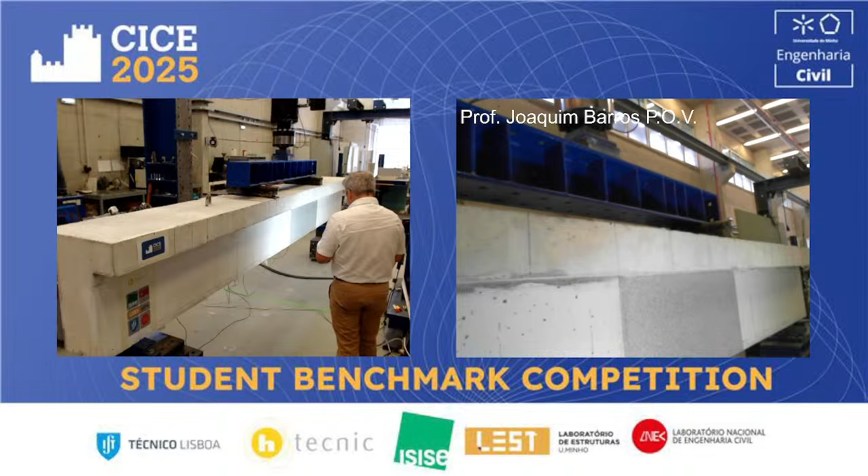At ultimate limit state, we will evaluate the maximum loads, the corresponding deflection, and the strain in the CFRP.

So we are ready to start loading. Luis, 10 seconds. Okay, excellent. So we are almost initiating.

These are the logos of the institutions supporting this experimental program.

It's also a great pleasure to announce that we received 6 participants using analytical models, and 5 participants using a numerical approach for making their predictions.

Today we will execute the first test, and later we will execute the second one. Then we will make the average of the results of the 2 beams. I don't know if I mentioned my name — I'm Joaquim Barros, and I'm coordinating this competition.

Okay, the load has already started. We will announce the loads. Manzuri is marking the cracks and the corresponding loads when they appear.

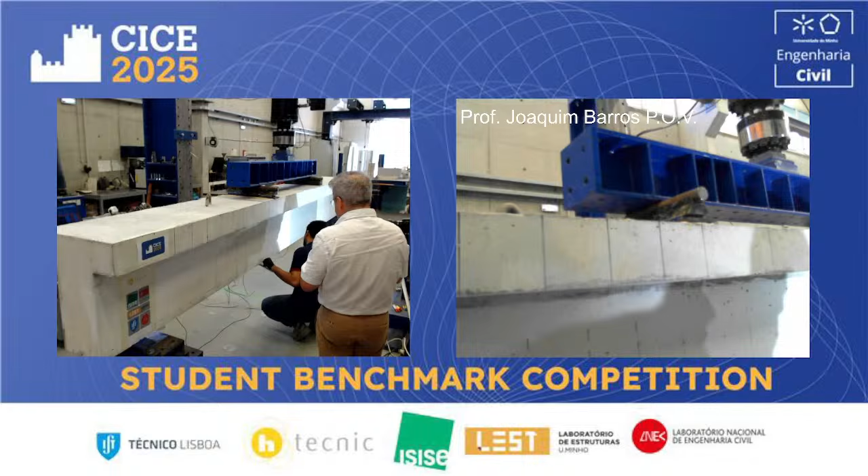So the load has already started. We have the DIC system here for a good prediction, to measure with accuracy the crack spacing and crack width. I remind you that crack width will be evaluated at the level of the flexural reinforcement.

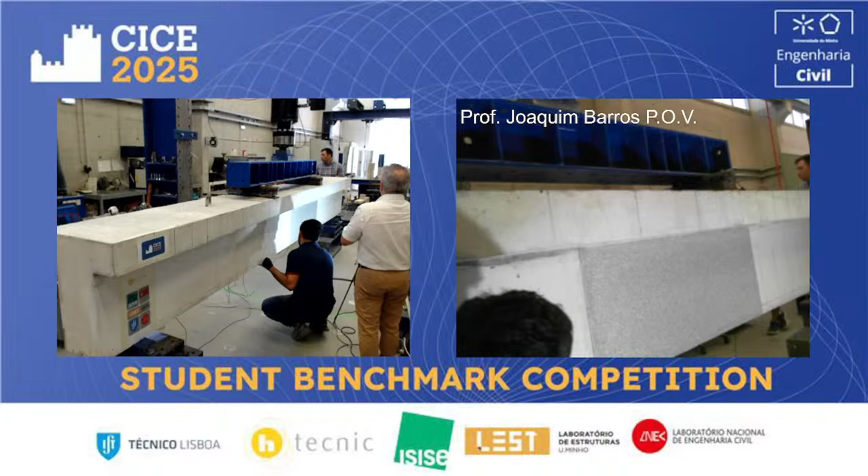So up to now, 30 kilonewtons. We have 30 kilonewtons at this moment. The test is being run in displacement control, controlled by an LVDT internal to the actuator, with a velocity of 20 micrometers per second.

40 kilonewtons. I'm going to the other side of the beam, where we have the LVDTs to measure displacement. We have one in the center of the beam, 2 in the loading sections, and 1 in the middle of the shear span.

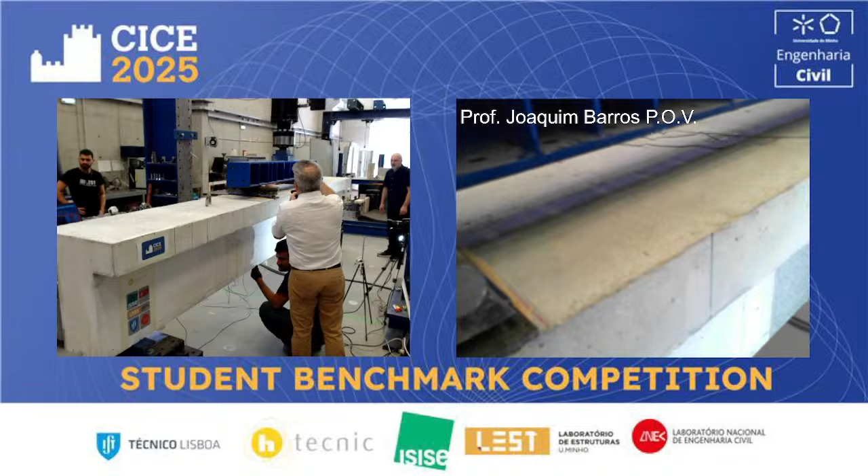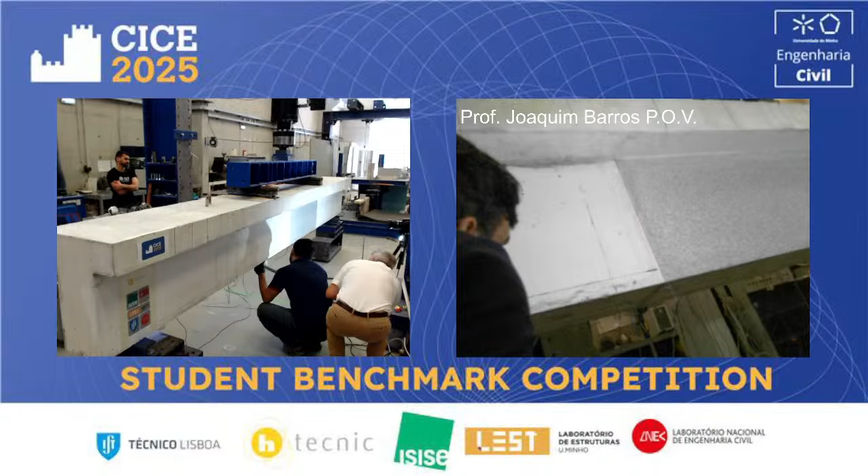We are also measuring the strain in the concrete. We have a strain gauge on the top to measure the strains in the concrete, and internally — do you see at the bottom — we have the strain gauges bonded to the CFRP as well as to the steel.

Load. The first crack happened at 70 kilonewtons.

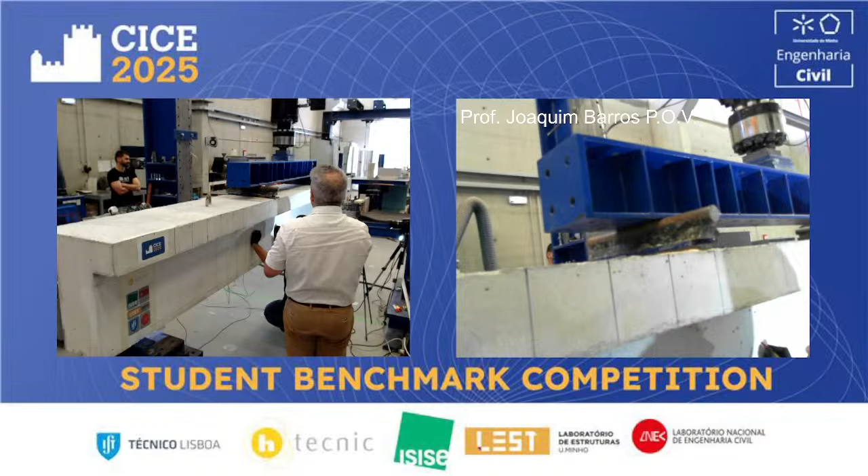Load. Manzuri is indicating the load — 74 kilonewtons at this moment. Load. 77, 77. As you can see, this is a flexural crack.

So in between the loaded sections — Load — we have 80, another flexural crack at 80 kilonewtons. It's progressing to the top.

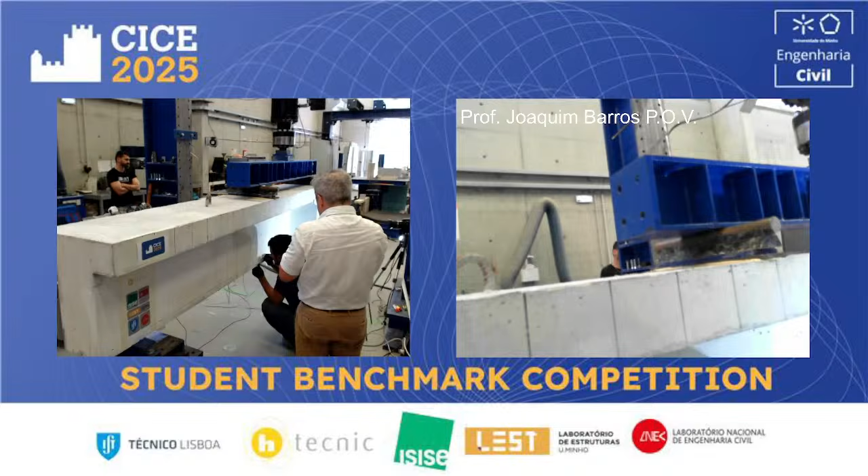Returning to my explanation: using the strains at the top of the concrete, and also the strains in the steel, we are able to evaluate the curvature of the cross section. This is an important indicator together with the moments, so using the moment-curvature relationship, we can estimate the evolution of the flexural stiffness.

Now the load is 87 kilonewtons. Do you see the crack spacing is quite nice, almost equal? 90 kilonewtons at this moment.

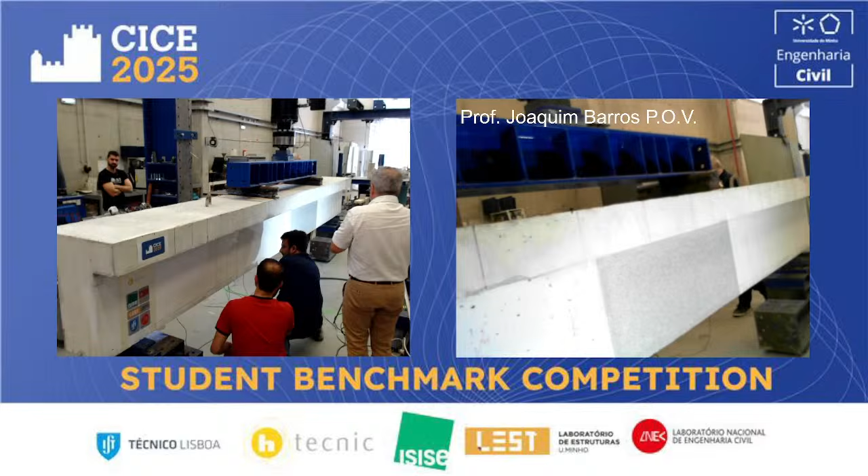So apparently we still have secondary cracks — do you see, now at 90 we have a secondary crack. In the DIC zone, obviously we cannot see the cracks directly, but we have cracks there as well.

95 kilonewtons. Load. 95, okay, 95 kilonewtons. Load. Another secondary crack, as you can see, at 97 kilonewtons.

Load 100. So the first crack in the shear zone, but obviously it is flexural, it is almost vertical. I remember again that we have several steel stirrups to force the flexural failure mode. We will see if the laminates will attain the tensile capacity in the failure of the beam, and if it happens, this means that we will mobilize the total capacity of the CFRP laminates, which will be very nice.

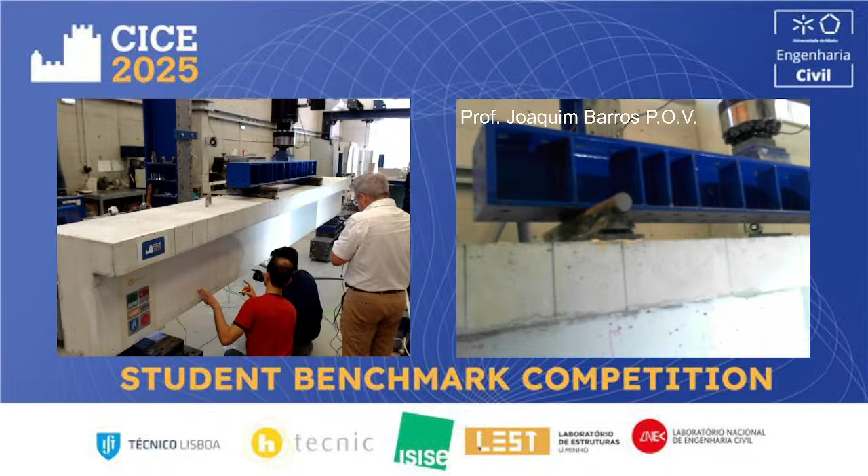133. It will be nice to verify if the existing analytical models and design guidelines are able to predict the crack width and crack spacing. Mainly crack width is quite difficult. It's even very difficult to estimate the crack width using finite element models, mainly those using a smeared crack model, because the crack width in the smeared crack model is the product of the strain normal to the crack multiplied by a certain characteristic length.

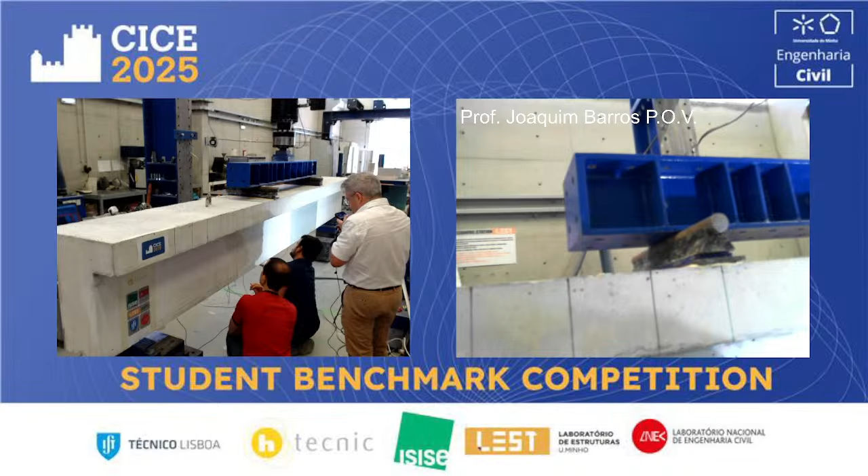We have some difficulties still to estimate this characteristic length, to avoid the results being dependent on the mesh refinement. This characteristic length is dependent on the geometry of an element, but we still have some difficulties to have good predictions in terms of crack width, and even on the strains in the materials.

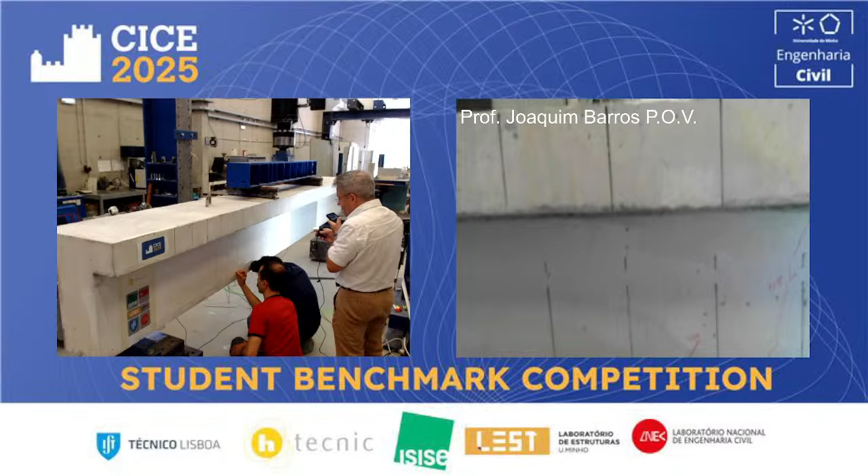145, we see here an inclined crack. So this is a shear crack, but I'm confident that this shear crack will be controlled by the stirrups. Okay, so 150, 150, 150 kilonewtons.

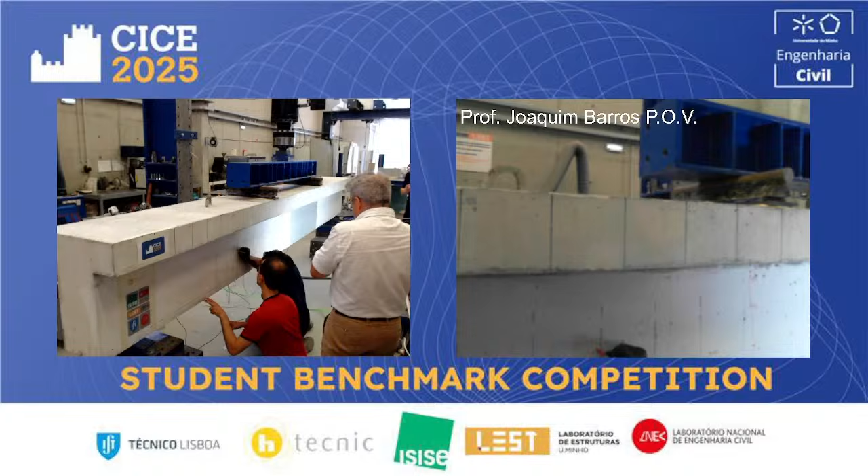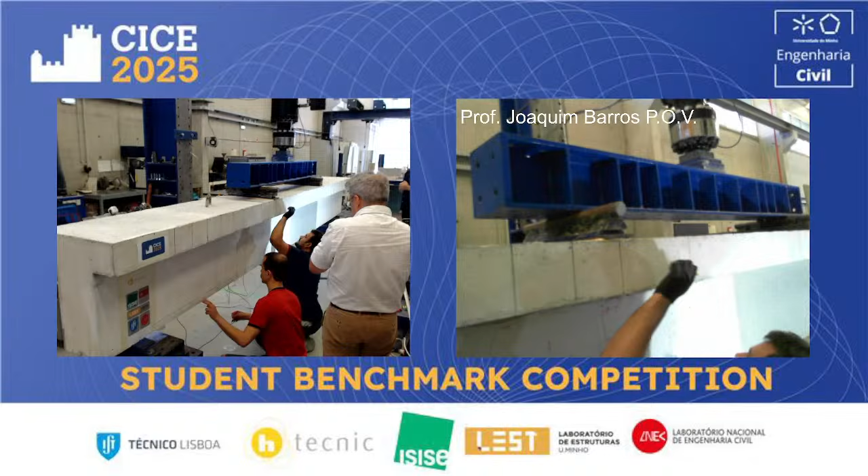When the CFRP laminates fail, we will have a drop on the load carrying capacity, and this drop corresponds to the loss of the CFRP contribution. Then we will have the load carrying capacity provided by the steel bars, and then we can interrupt the test because we have already attained the maximum load. So this means that we have the information corresponding to the maximum, and corresponding to the deflection, and also the strain in the CFRP, and then we don't need to continue.

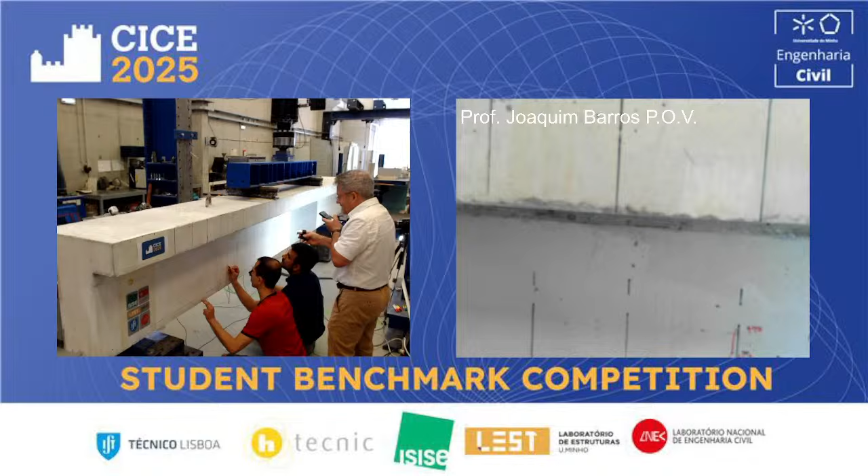170, 170, 170. Okay, so it seems curious. So this shear crack now, load, now it's aligning along the stirrups. So the stirrups are being effective to control the propagation of the crack.

I remember that we have also a phase we designated as the crack formation stage, when several cracks are forming, but at a certain moment we attain what we designated as the crack stabilization stage. This means that no more cracks will be formed, and then the crack width will start concentrating in the critical crack. A new one - okay, you see a new one, a new crack in the shear span.

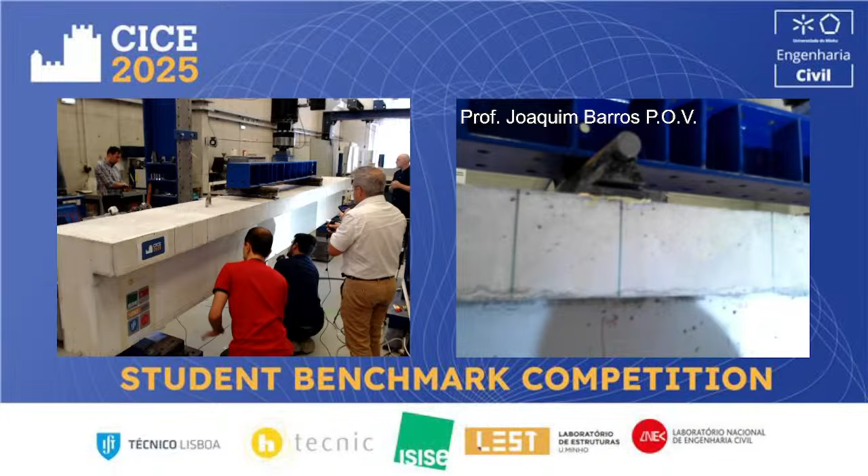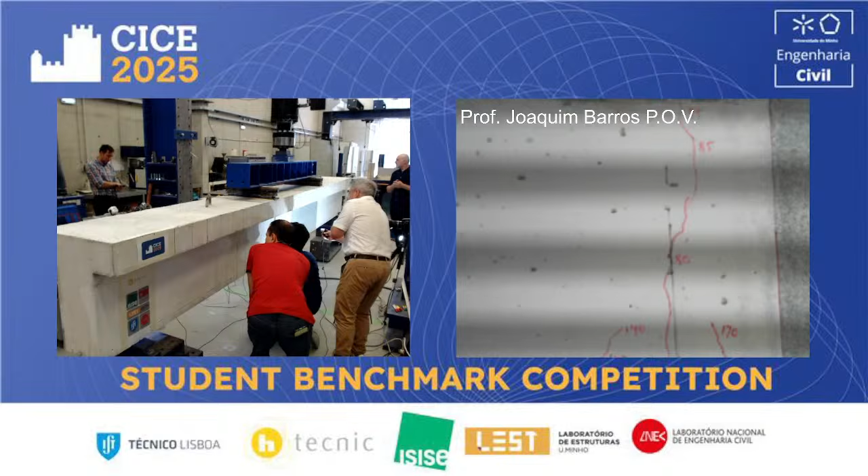It seems that here we have maybe the critical crack. It seems that the crack width is being concentrated. You see, the crack seems to open more in this crack. This one also, so it is 195. 195.

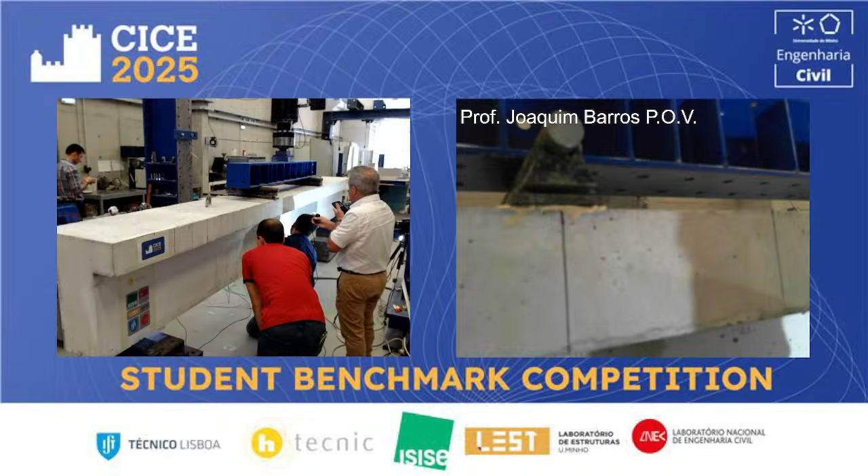At a certain moment, the crack will progress into the flange. In the flange, but not yet. So this means that the neutral axis is still in the web. But I believe in a few minutes we will have the crack progressing, 205. In the flange, 205. 205.

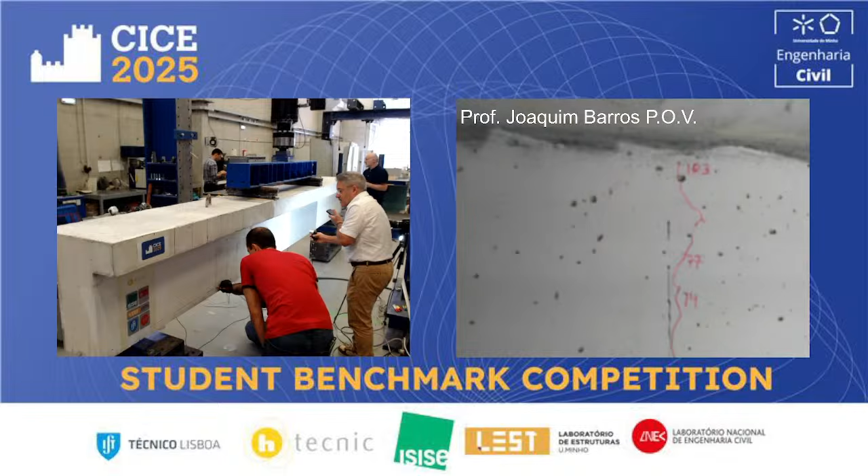Load. 208. Load. Load 214. Another load. 216 kilonewton.

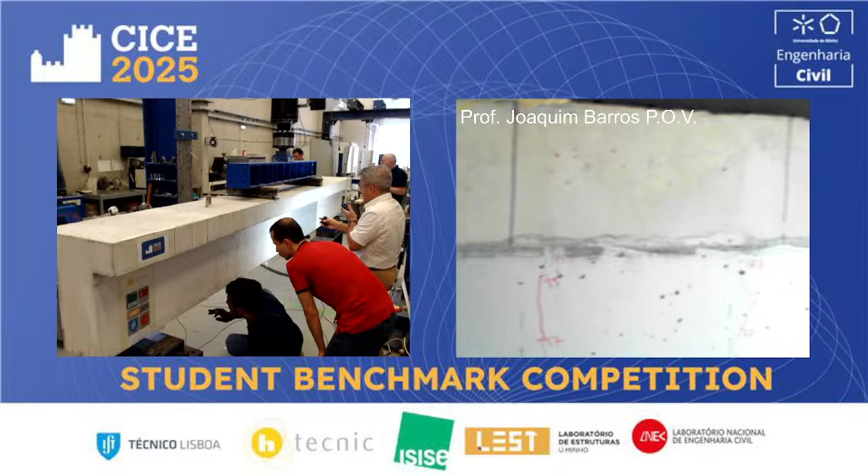220. Well, it seems that we are attaining the phase of crack stabilization. Load. 224. Load. 226.

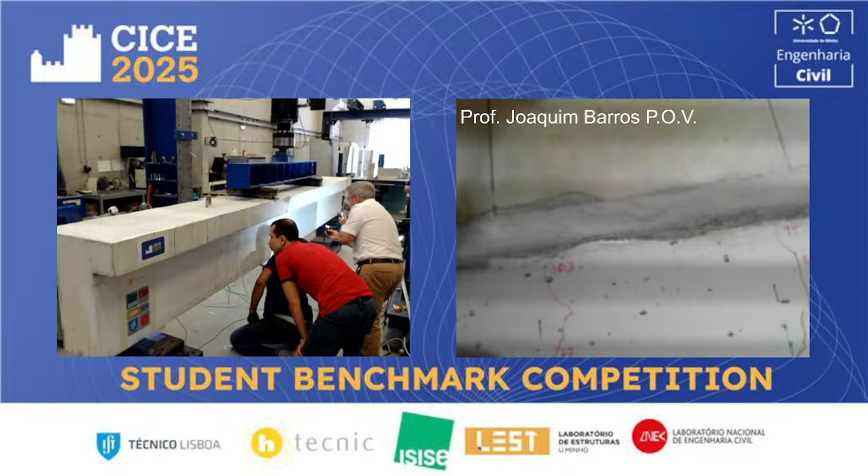Okay, now, yeah, so load - now finally the crack is progressing in the flange. So we have two main cracks in this zone. It's half of the pure bending zone, because the other part is being occupied by the DIC. Load, 237 kilonewtons.

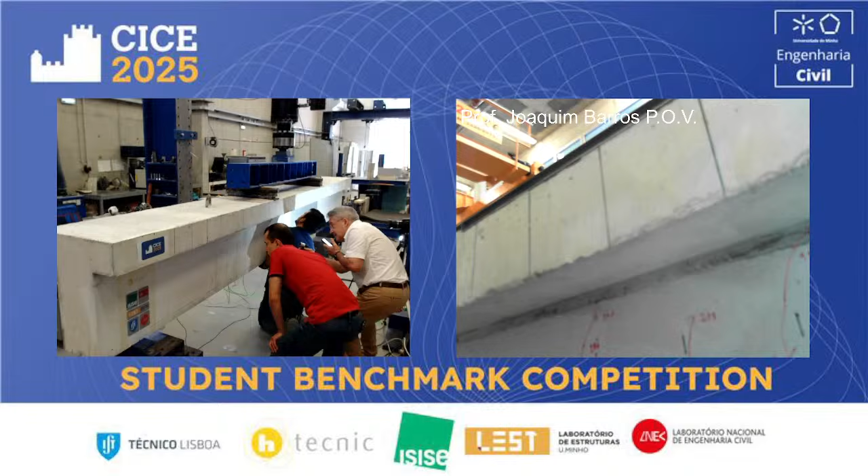240. Now exactly this crack is progressing through the flange. So the inclined crack has attained also the flange, or is attaining here. So we see it's inclining now, it's in the interface between the web and the flange.

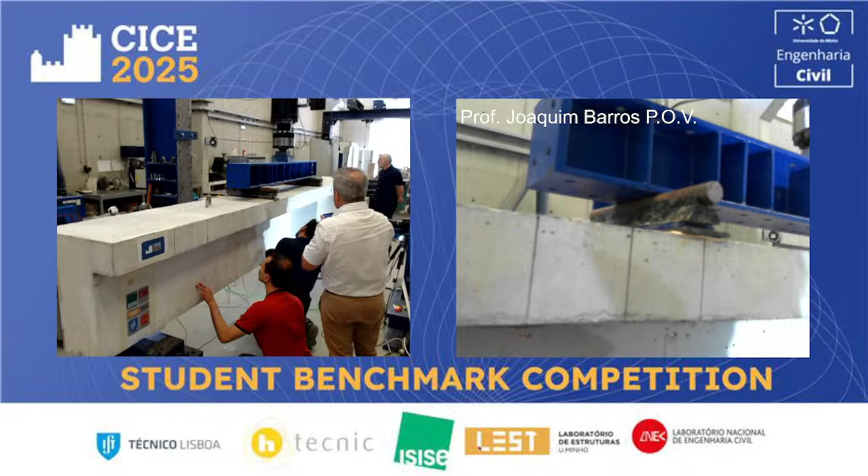This crack, 250 kilonewtons. 250 kilonewtons. 255.

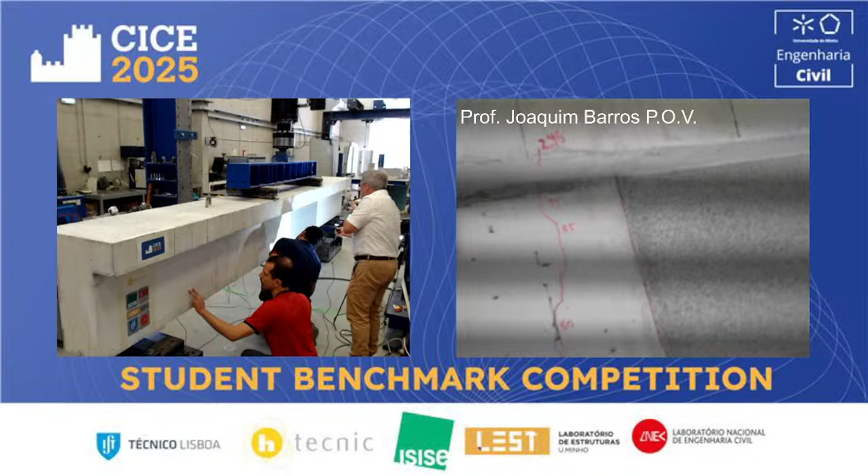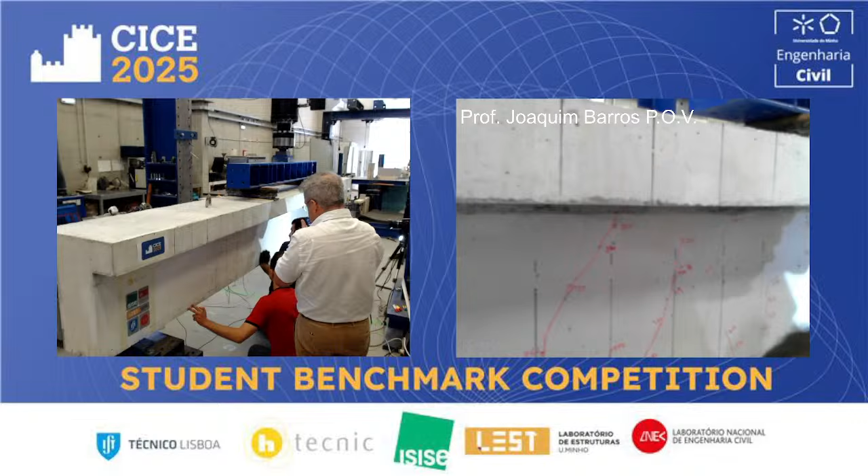Load. Some ramifications, and the cracks that are formed in the shear span. So now the crack that is closer to the middle span is progressing.

Load to 258. So it's progressing through the flange. Well, the crack opening is clearly increasing.

259. So this is a new crack in the shear span. Load. The opening here of this crack is also significant, 260.

The participants can start checking their estimates to see how good the predictions were. Well, but obviously we are still loading. 263 kilonewtons. 264.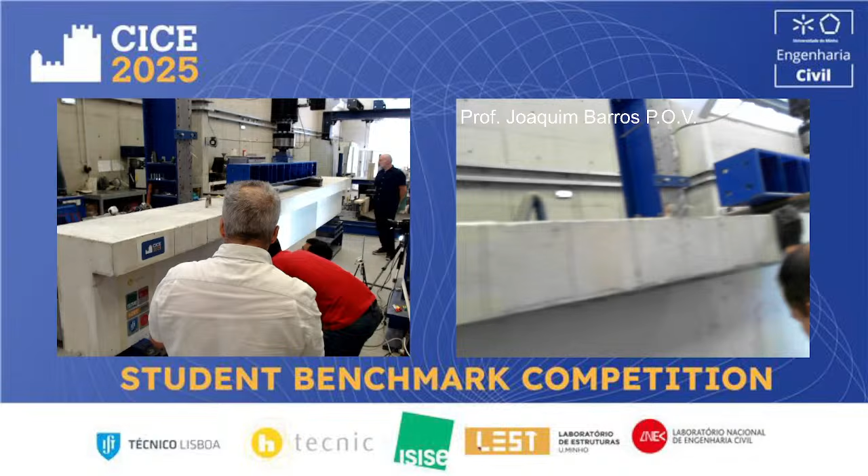But we will see if it will degenerate into the critical one. I'm coming again to the other side where we are marking the cracks, at 272.

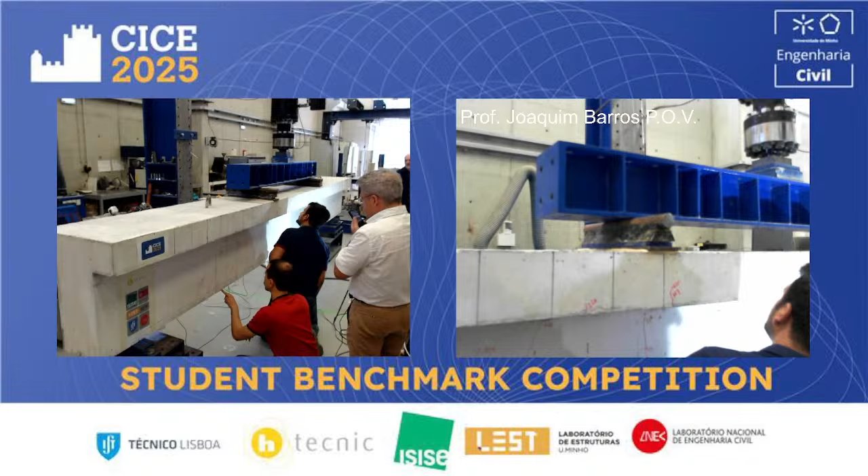272. Note. 274. So a new crack is progressing on the flange. 275. So the increment of load is now, the gradient of increase is much lower, because the stiffness of the beam is much lower due to this crack propagation.

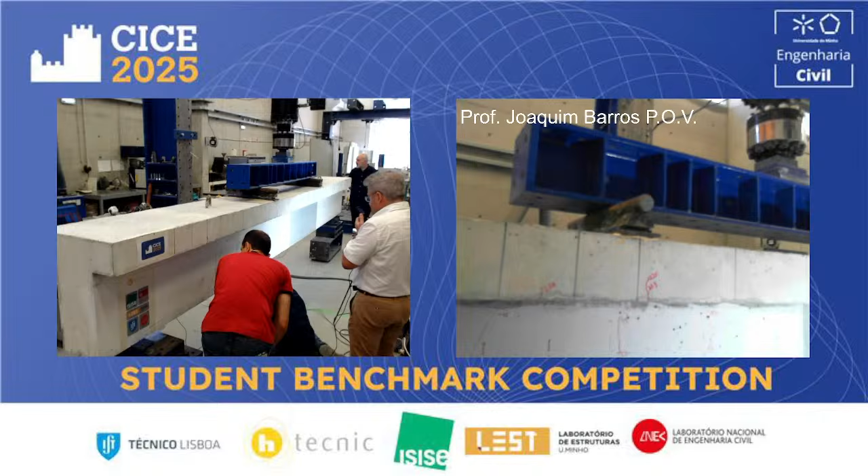We will provide the force-deflection relationship when we conclude the test, and this will be very visible, because up to the crack initiation the behavior is elastic. Then we have a second branch where the stiffness is decreasing, but in general smoothly, and these phases correspond to the crack propagation up to the moment where the longitudinal steel starts yielding. Above this stage we have mainly the contribution of the CFRP laminates. At this stage the longitudinal steel bars are already yielded. Obviously they continue to make a small contribution because the steel has some hardening, so they provide some contribution to increase the load, but this increment is marginal compared to the contribution of the CFRP laminates.

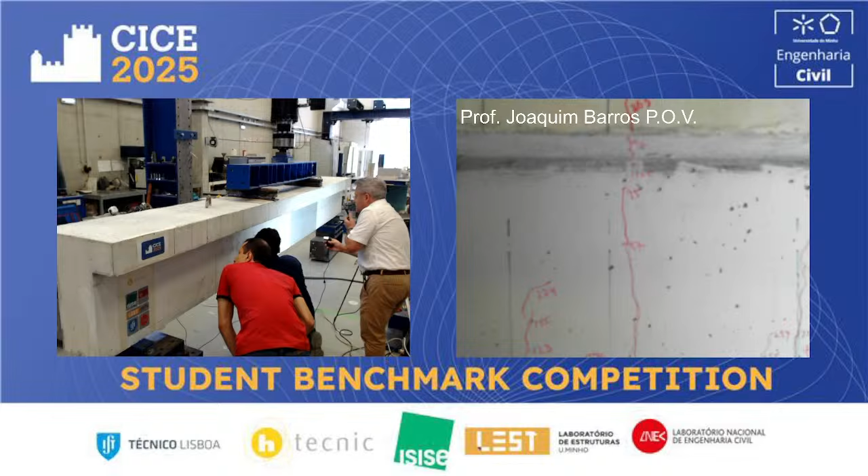282 kilonewtons. So we see relatively large crack width in the crack that is at the loaded section, but the other two cracks have also significant crack width.

So it seems that now, at 285, the main cracks are already formed. Now it is the propagation of crack width in the major cracks and the propagation of the cracks towards the top of the beam, so the neutral axis is going up.

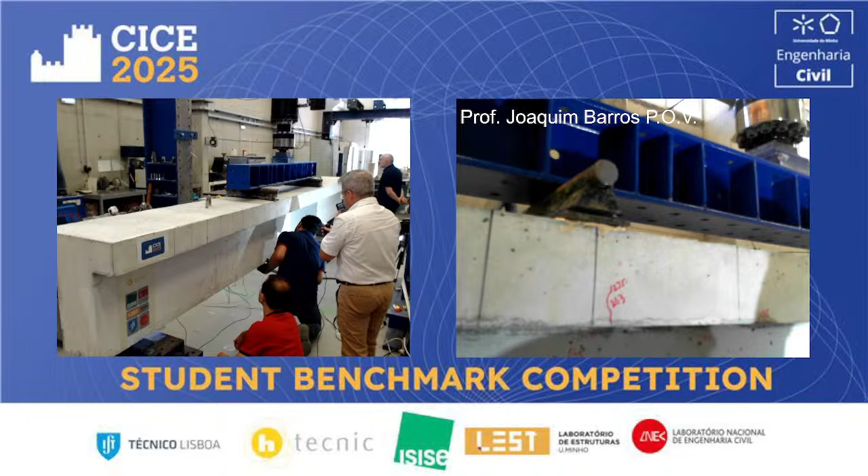So we see here the cracks in the shear span seem totally controlled. The crack width seems not increasing. So the crack width seems to increase in the pure bending span, in between the applied loads.

The contribution of the laminates is significant mainly after the yield initiation of the steel. So we are approaching 300 kilonewtons.

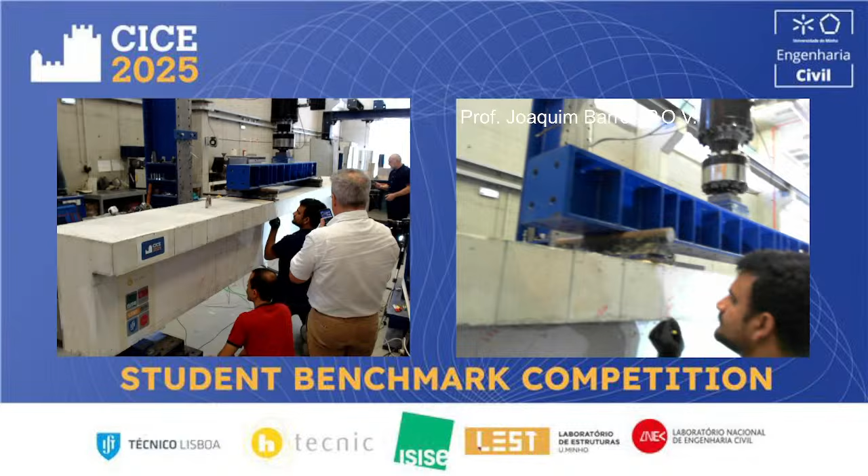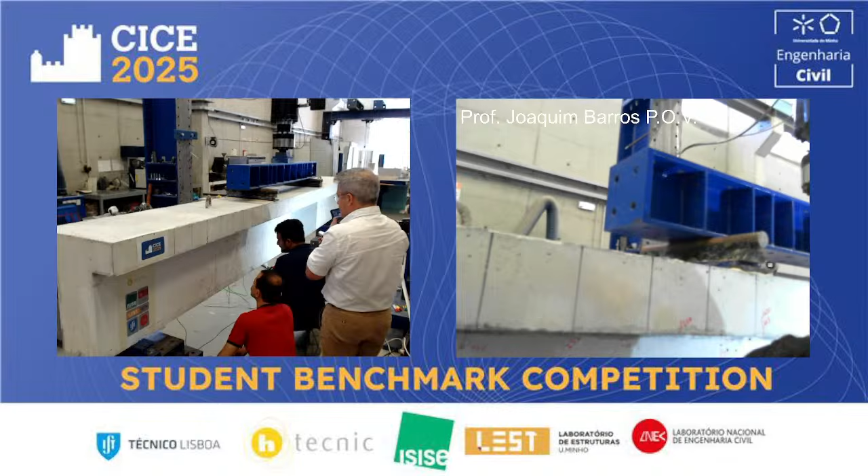Load 292. Load 294. I remember that this test is being controlled in displacement, at a velocity of 20 micrometers per second. 295 kilonewtons.

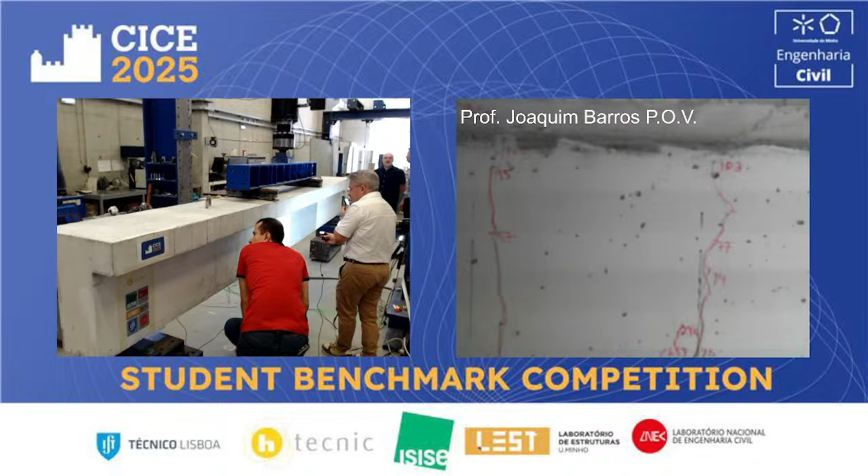So the crack width in this crack is larger almost in the middle of the web than at the level of the reinforcement, due to the tension stiffening effect. Load 296.

As you can see, the cracks in the shear span have a certain inclination, 298, due to the principal stress orientation. So the crack is progressing to the top, 298. Load 298. Okay, 298.

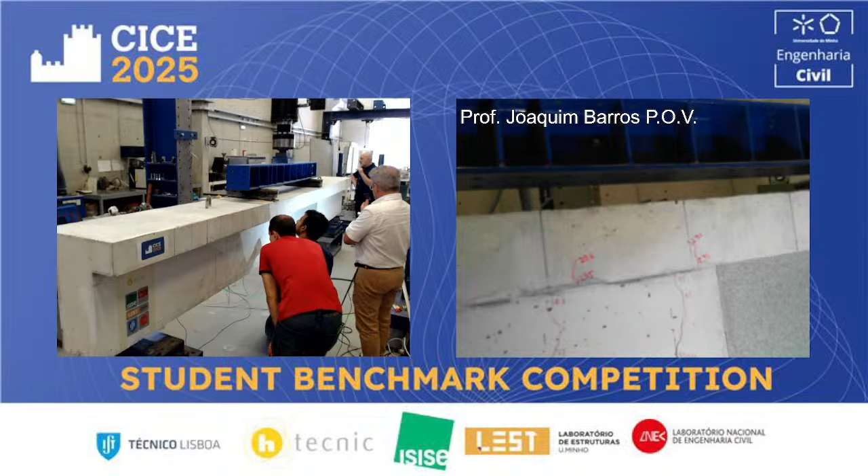João seems to indicate that the load is in a plateau at this stage.

So the crack width is larger in this flexural crack, as you can see clearly. 299. So the crack is now progressing. The load increase is now very slow. 299. 300. Okay, good.

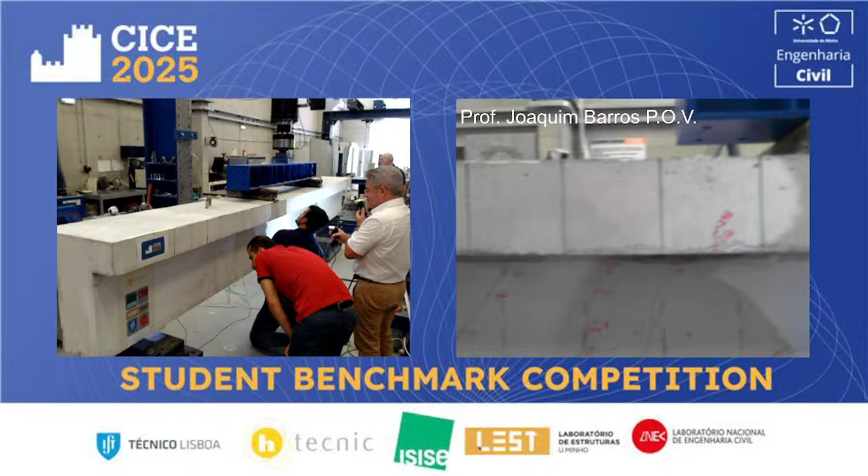302 is a new crack close to the support. Since the load is increasing, obviously the cracking moment is close to the support, and then we have the formation of cracks when the principal tensile stress attains the tensile strength of the material, and this forms a new crack. 305. Okay, good.

305. So this inclined crack is apparently merging with the vertical one, but the cracks in the shear zone clearly have a stabilized crack width, so it's not increasing. What is increasing is the width of the main flexural cracks.

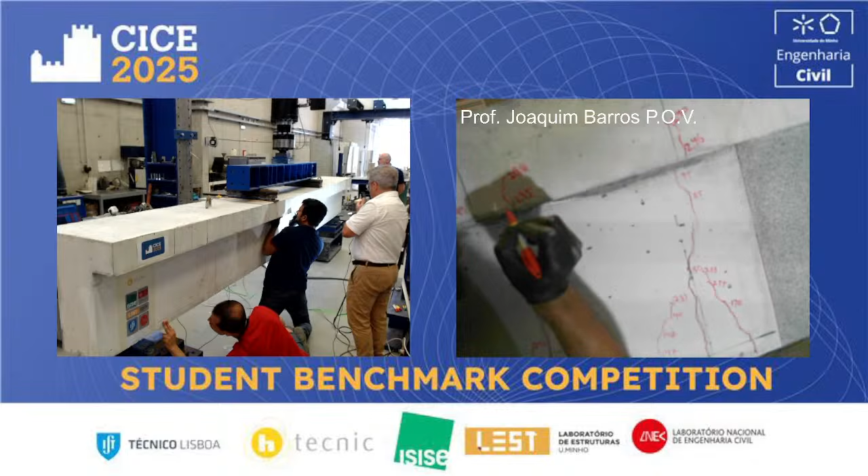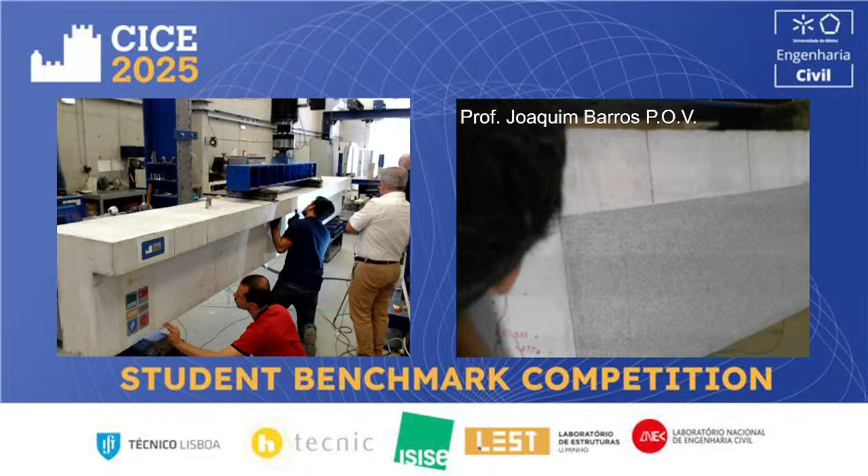We can see in the DIC window also the flexural cracks, and the spacing is very clear and very similar, the distance between cracks, which means that we will have very good information in terms of crack spacing.

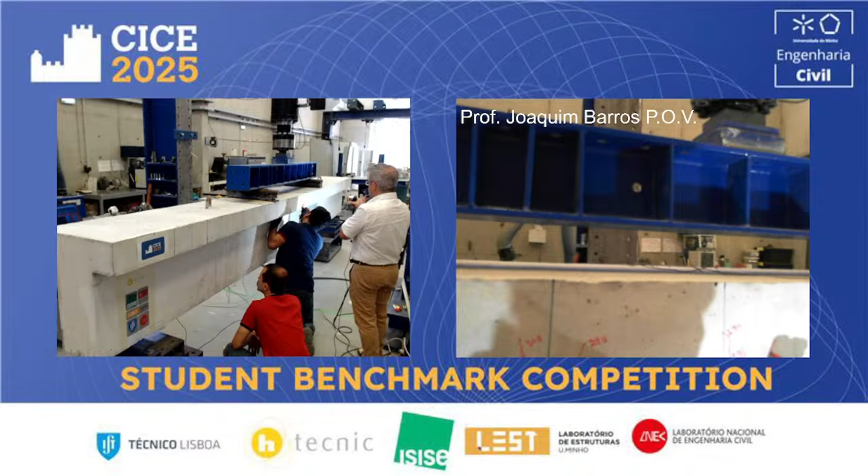Okay, do you see this relatively large crack width? I believe that now we have more than, I think, 1.5 millimeters of crack width, apparently. 312 kilonewtons.

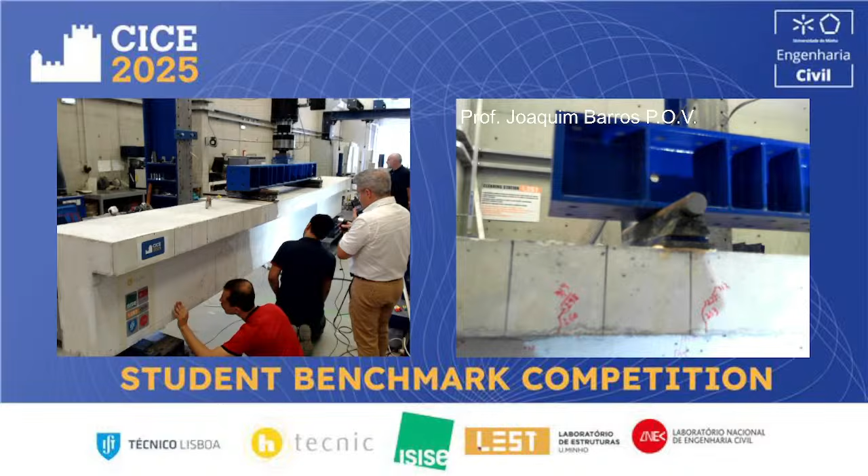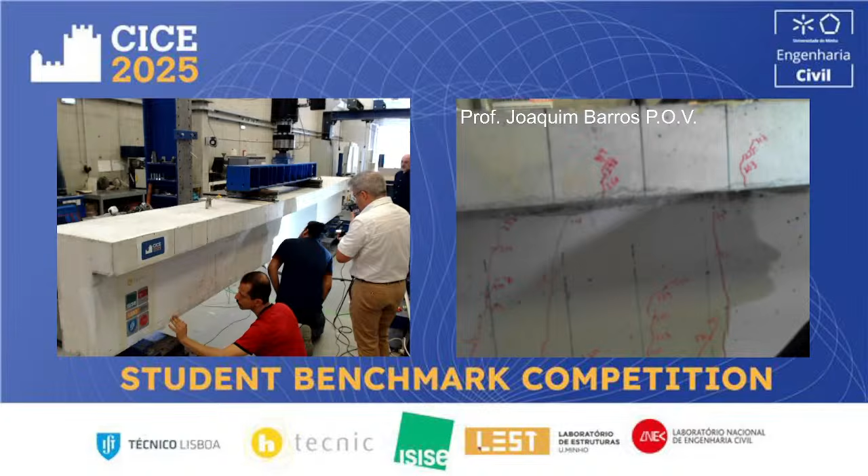In the shear zone, it seems now everything is stabilized in terms of crack propagation, and now is the moment where the main flexural cracks are progressing. They are in competition for which one will correspond to the failure. We expect that the laminates crossing these primary flexural cracks will fail in tension. If this happens, it means we are mobilizing the total tensile capacity of the laminates.

319. Okay. I will try to show the bottom at this moment. Do you see? So we have the... Thank you.

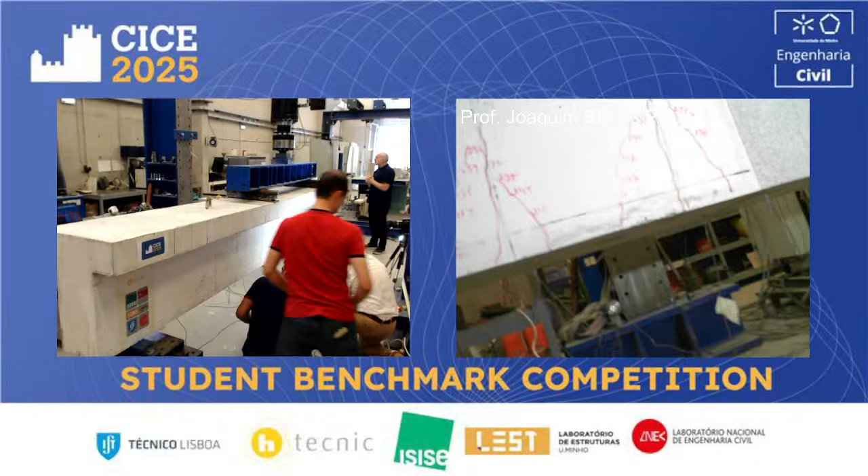319. Have the cracks failed? I suppose we are still far away, a little bit. So when we approach 330, I will give orders to our excellent collaborators to not continue to mark the cracks because it starts being unsafe.

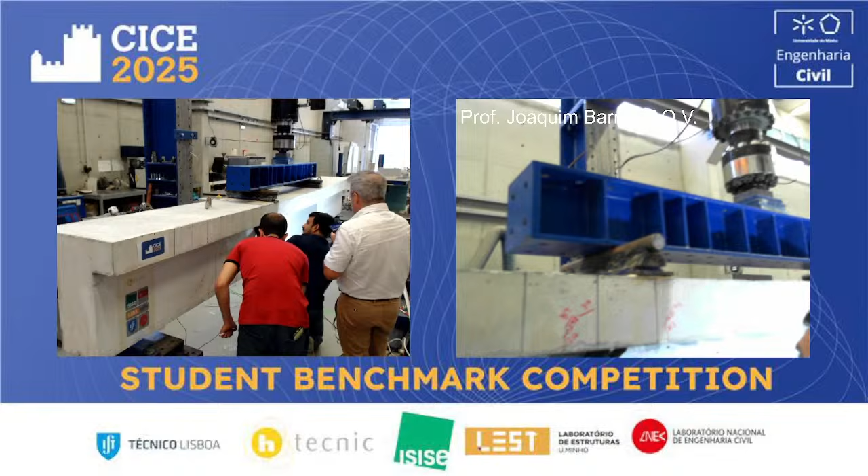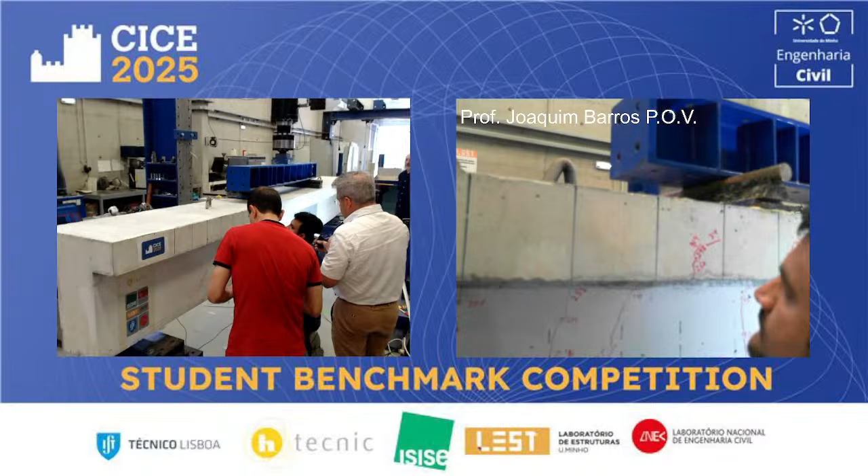So we see the very large crack width. Mansour, in a few seconds I think it will be better to interrupt this operation, because it will become unsafe. 322, it's only more. When we attain 330, we will interrupt. You need to leave this zone.

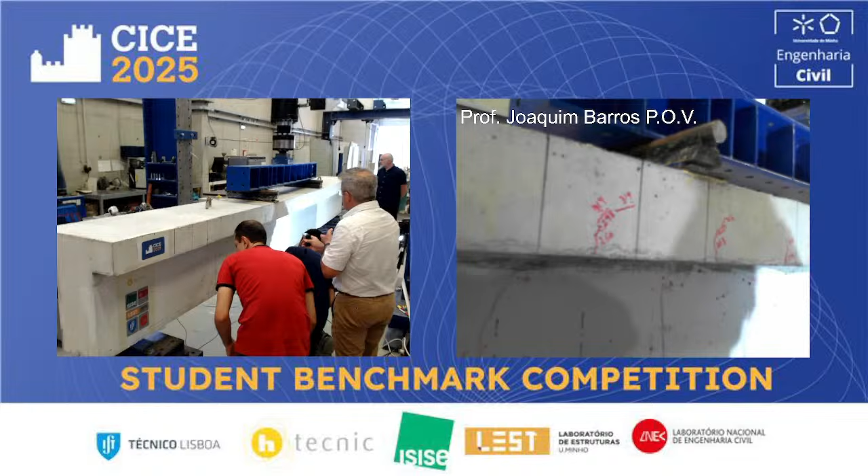324. It seems that in fact the crack in the loaded section is the one where we have the highest crack width.

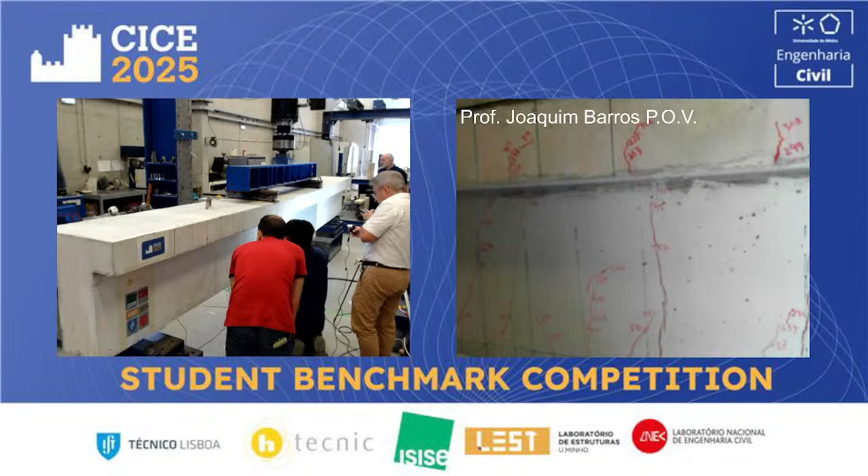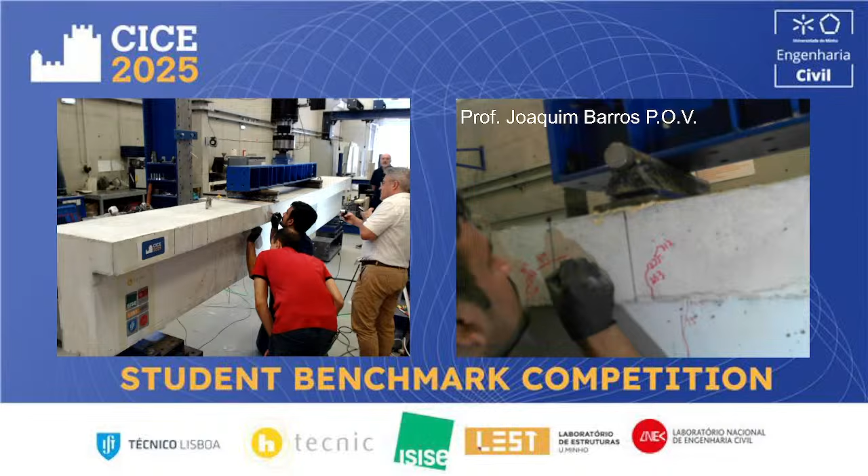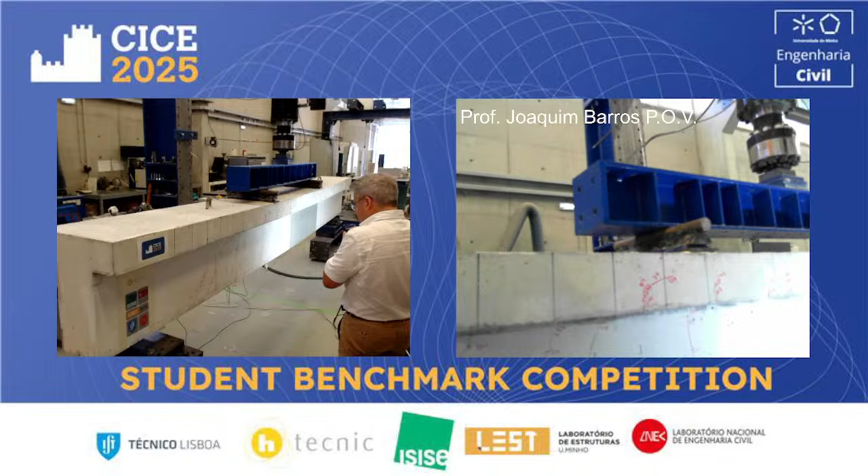Load, 329. Okay, it's enough now. It's enough, okay? Now, due to safety reasons, because the crack width is very significant, it seems to be about 2 millimeters in this zone. So now it's recommended to leave this zone, and also because the propagation of the cracks is mainly in the critical one, it does not make sense to continue marking the cracks since the relevant cracks are already formed. So we have the propagation of the main cracks to the top of the beam, but I will try to show you the bottom.

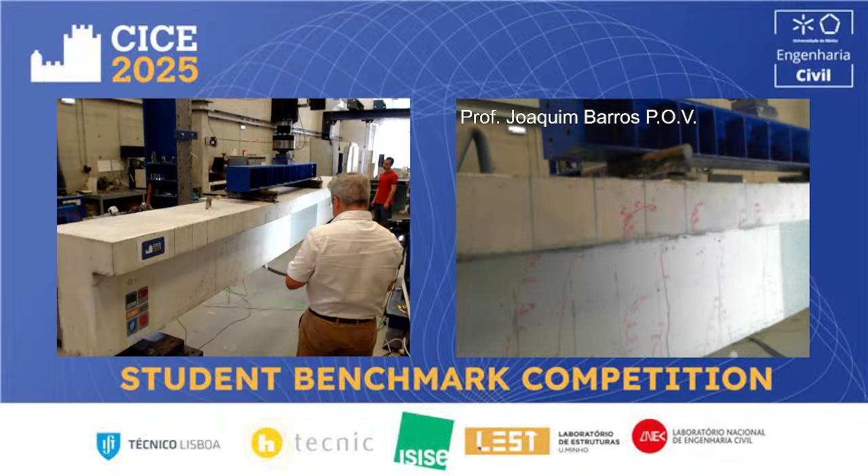335. So the load continues to increase. I'm going myself to a safer zone. Now I'm at more distance from the beam.

Okay, so we see the crack width is localized, or the opening seems to be concentrated in the crack in the low section. I hope the bond conditions of the laminate are good enough to mobilize the tensile capacity of the laminate. I have good expectations about it, but we will see in some seconds, because I think we are approaching the failure load.

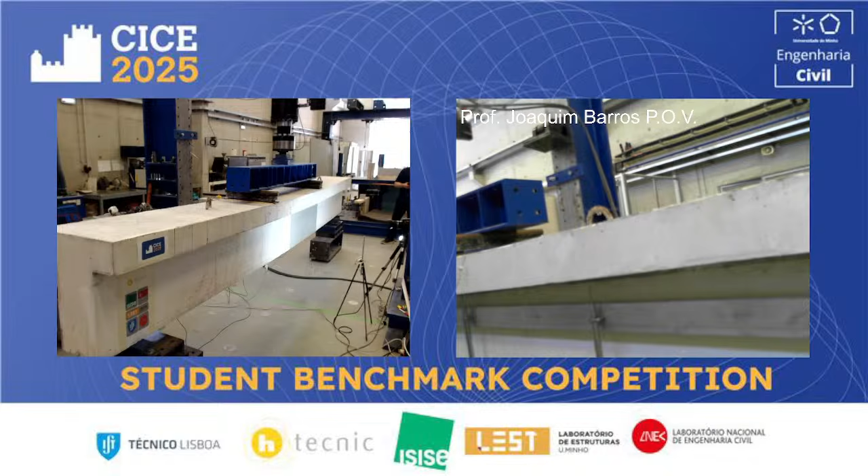The LVDTs are supported on an aluminum bar. This aluminum bar is supported at the alignment of the supports, to avoid recording spurious deflection. So we are only measuring the deflection of the beam.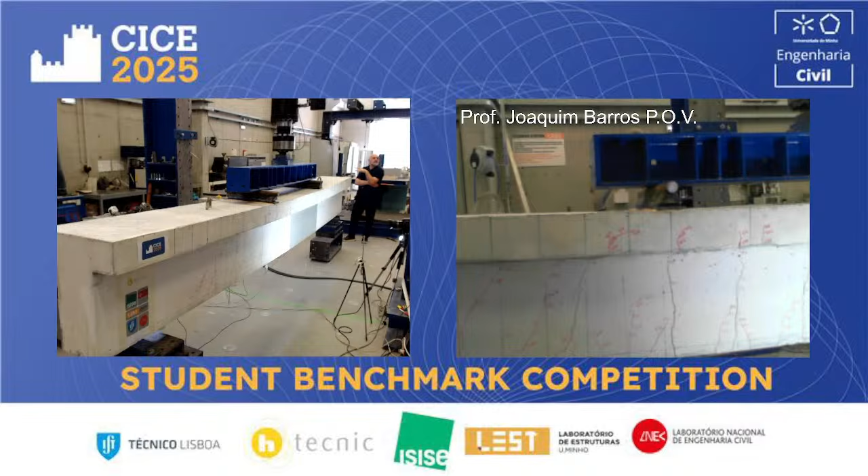Well, so I believe that the participants who have estimated can now check their prediction, because the load is not too far from the ultimate load, this is my impression based on the crack width. I imagine those who estimated the ultimate load closer to 400 kilonewtons are hell praying that the beam is capable to support some more load. To be honest, I don't remember the predictions, but I realize it's in between 320 up to 400 something, which means that's not bad.

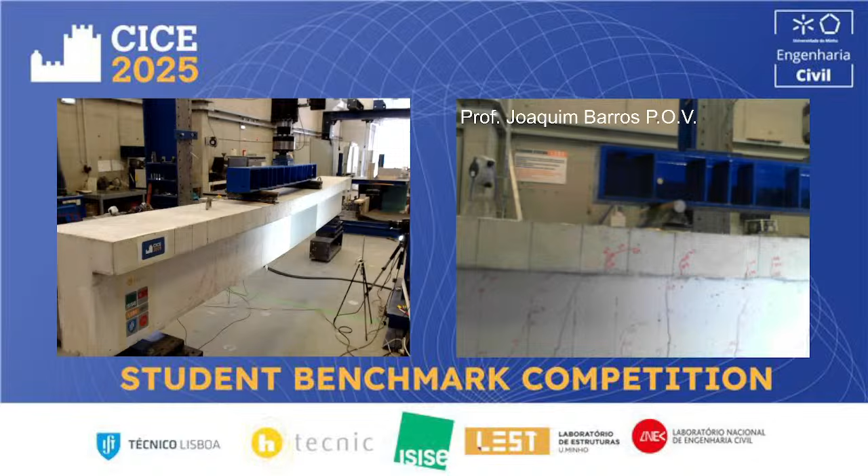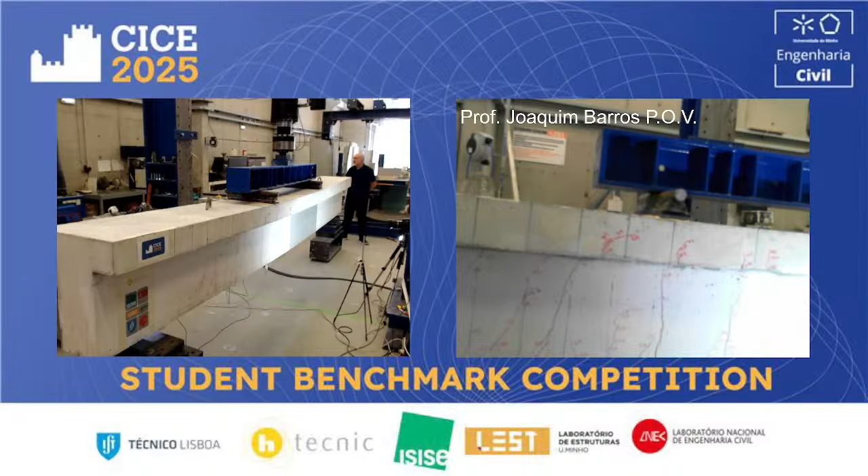The crack width is very, very large in the loaded section. It's amazing. I'm almost at 2 meters distance, but I think the crack width is more than 3 millimeters, or 2.5, something like this, more or less, in between 2 and 3 maybe. 365, 365. So the question is, is the beam able to attain 400 kilonewtons?

Okay. Some question or not? No questions, okay. Someone just asked if we are still loading. Yes, we are still loading.

Oh, it's amazing. Now this crack in the shear span, the crack width has now increased significantly in the last seconds. Do you see? Wow.

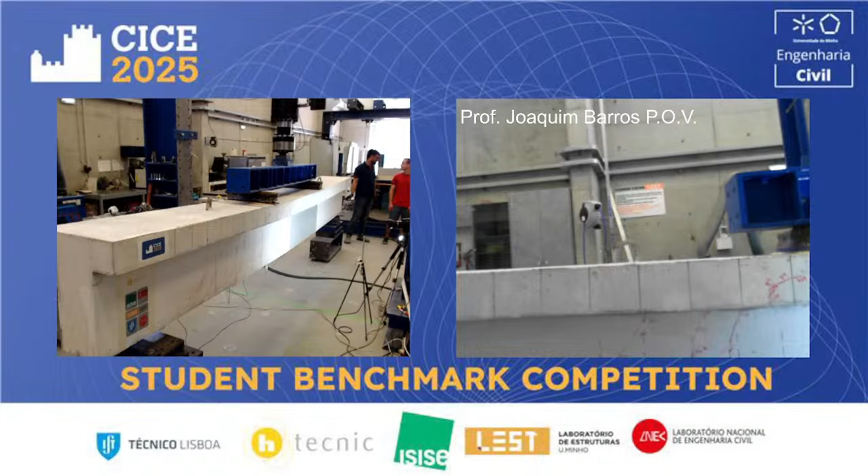So the crack at the top is relatively small, so this stirrup is not suffering a lot. The crack width of the crack in the loaded section continues to open. It's amazing. We are approaching 400 kilonewtons.

Some inclined cracks in the shear zone are progressing. It was not marked, but we see that it's progressing up to the soffit of the beam. Okay, the load crack continues to open. João, load: 380 kilonewtons.

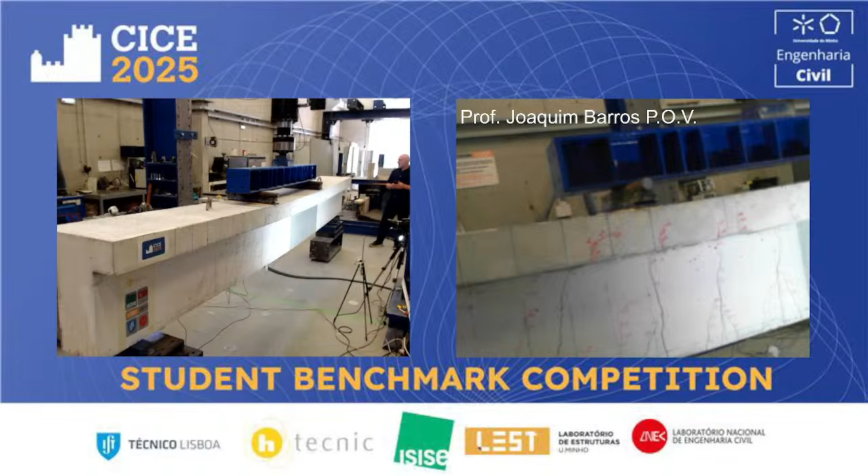So the beam still survives, continues to support increments of load, but obviously in a very smooth way, because at this moment the contribution is mainly due to the CFRP laminates, and also some hardening of the longitudinal reinforcement and the concrete that is in compression.

The tensile contribution of the concrete at this stage is almost null because the crack width is very high, so the post-cracking tensile capacity of concrete is exhausted for a very small crack width. So in these major cracks, the contribution of concrete is only due to the concrete in compression.

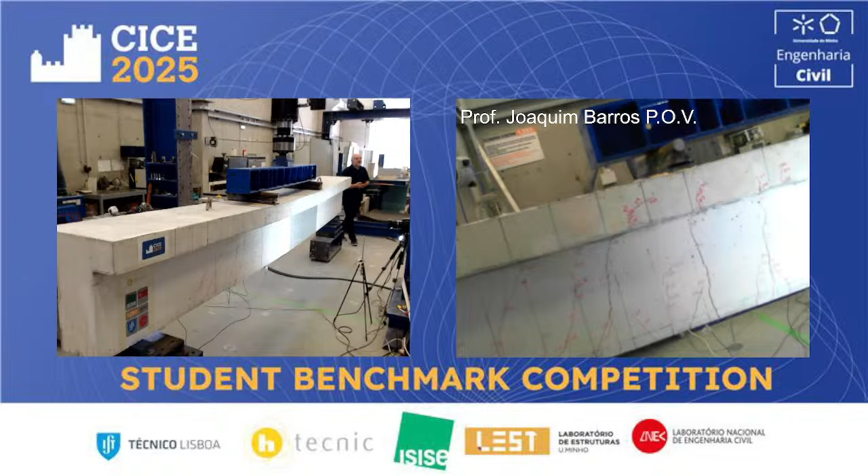So it seems that the beam will be able to attain 385. It's amazing. Wow.

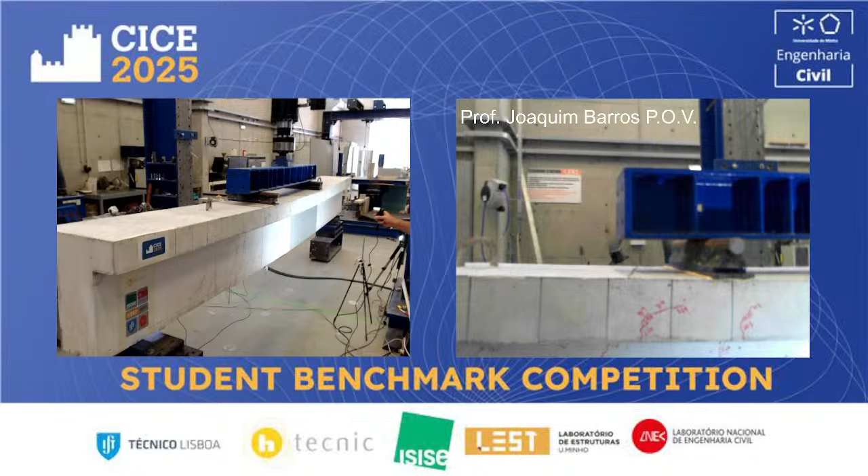So in the top, in the flange, it is visible that the cracks are inclined, going directly to the support. I don't know if it is possible to see, but the crack is progressing up to the zone where we have the load.

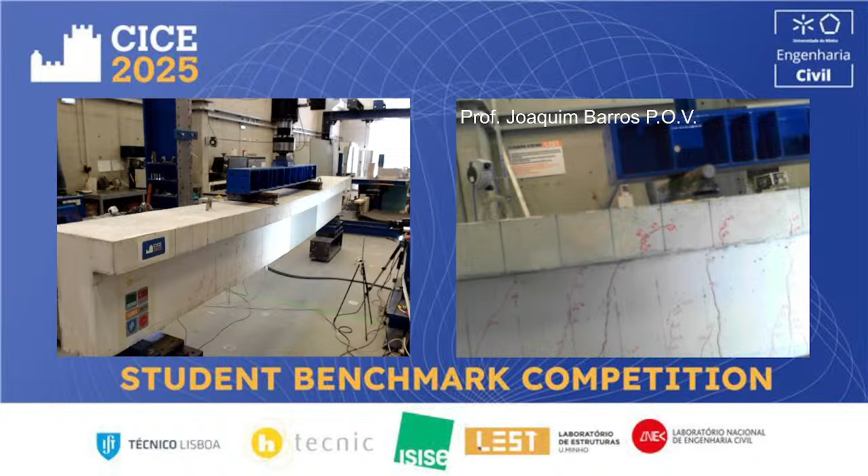Okay, excellent. Do you see the crack width in this crack continuing to increase? So this is in direct competition with the cracks in the flexural zone. And the bending moment here, as you know, is lower than the bending moment in the pure bending zone.

Now we start having some sounds. So I believe that... oh, and it fails. Oh well, it's the end, and due to this very abrupt load decay, we have the tensile rupture of the CFRP laminates, but we will see.

Can you? Can you? Yeah, we put in. Okay.

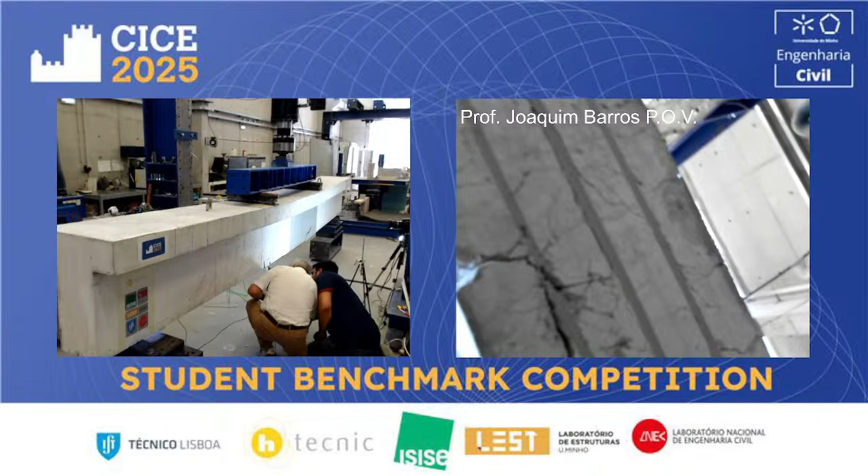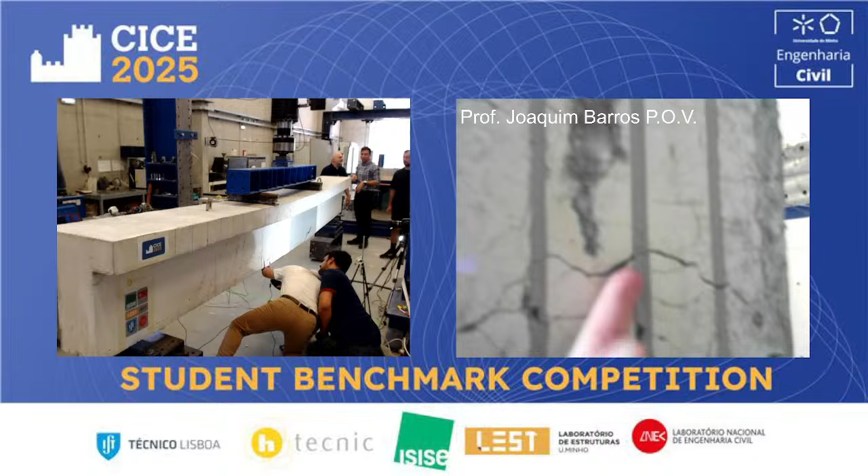It is still loading, but now the contribution is due to the existing steel flexural reinforcement. So it seems we have the failure of the laminates in several zones - we see here, but we have also the failure in this one. So this fails in several cross sections. The bond was incredible. These are the inclined cracks due to the bond transfer from the laminates to the surrounding concrete. It's amazing because it fails in several locations. So it was mobilized. Okay.